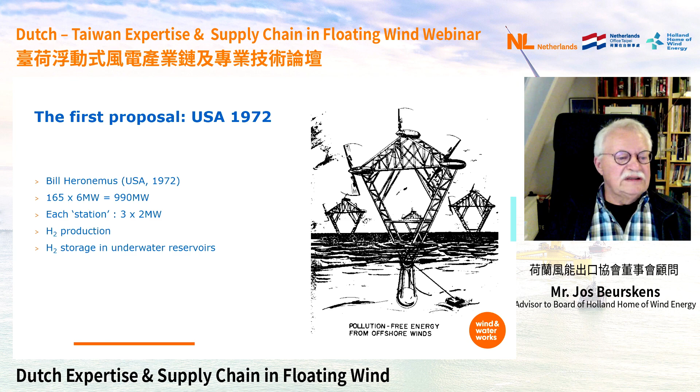But let's look now at the present situation. Next slide. Between '72 and now, quite a bit of research and demonstration happened. After a decade of relative quietness in this area, in 1993 research started both on national levels, but also within the IEA and within EU projects were initiated. There are many projects which were carried out, but here are the key topics.

Of course, we have been looking into resource assessment and mid-ocean conditions, which is actually an input for the design of the total system. We have been looking at the taxonomy of support structures, the dynamics of both the underwater world, the foundation, and what happens above the water level, the structural dynamics, the aerodynamics, and the aeroelastics of the wind turbine. The big challenge is to integrate those two actually separate scientific worlds, and to a great extent this has already happened.

Then came a period of specific design studies and designs, prototype testing we have seen in a number of countries. The first demonstration projects are in operation, and now we are at the brink of large commercial application. In parallel with commercial application, research into optimized logistics, port facilities, transport installation systems, and operation and maintenance is starting. If you ask the experts, they say there's no essential gap in the know-how. There's plenty of room for improvement, but all the essential elements of what we need to build those farms is available.

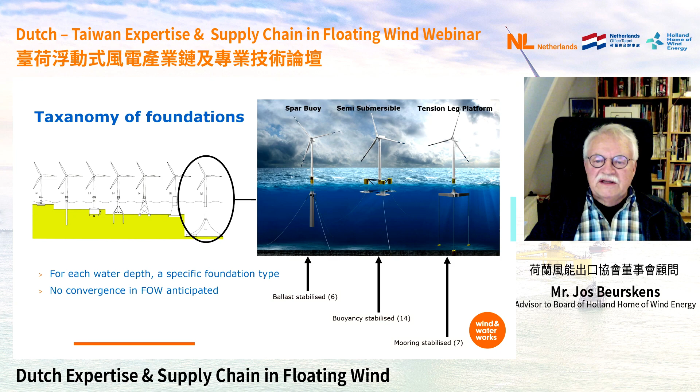In the next slide, I will show you that the choice is rather complex. If you look carefully, you will come to the conclusion that there is, for the time being, no predictable convergence in foundation type. On the horizontal axis you have the types, and on the vertical axis the aspects to look at, like relative steel mass connected to cost, critical water depth, transportability, port facilities, mooring complexity, etc. This list is longer, but the scores for different foundation types differ, and the optimizing process is very complex. That's why we will see many options in the near future which are, for the time being, very good.

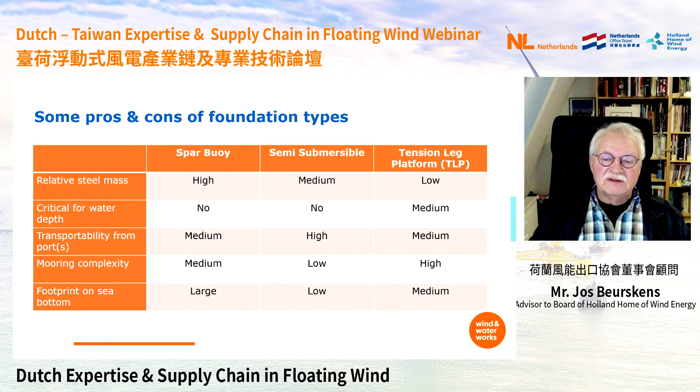The DNV, for instance, reports we have now 100 megawatts of offshore floating wind, and we will go to 250 gigawatts by the year 2050. That's 2% of the world electricity supply from floating structures, and 20% of the total offshore market at that time.

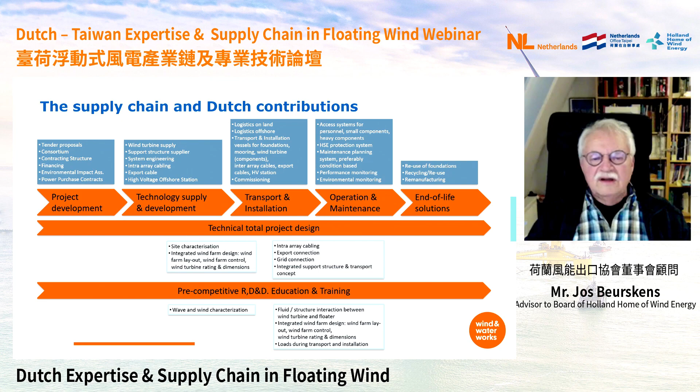A rough picture of the supply chain of floating wind in general. The blue boxes show the details, and the red ones the major blocks, the major elements. I will use this picture to show you a little bit about what the Dutch industry is now providing.

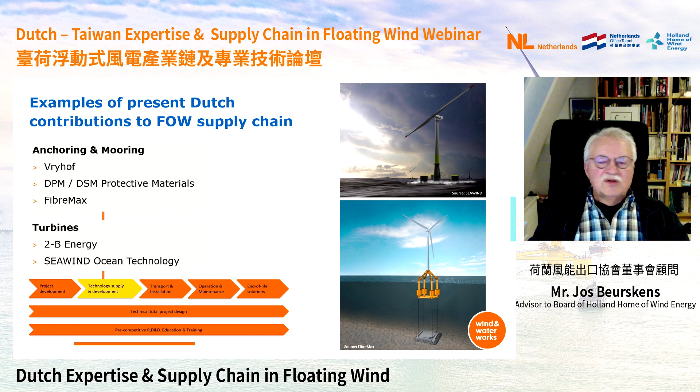This is a little bit of a strange part of the supply chain. I skip operation and maintenance, because there are no companies yet working for floating wind, but they are all working for bottom-fixed offshore wind farms, and it's not too strange a step to go to floating wind activities for operation and maintenance. But of course, there are particular differences.

End-of-life solutions become more and more important. The dilemma is that we have to take those aspects of the supply chain into account 25 years in advance of the actual activities, so it has to be an integrated part of the design process. There are a lot of developments and studies going on already, but it has to be included in the project design once again, and there are two things which are particularly important.

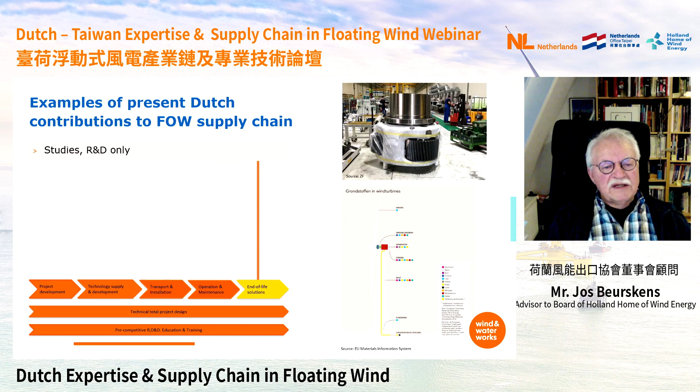That's the remanufacturing part. The rotating part might be refurbished to be applied in new wind turbine systems. This is a thing which can be adopted to a great extent from the automotive industry, where remanufacturing is a big thing—you cannot buy a new car which does not have a remanufactured part in it already. So that's something to look at, and it requires quite a bit of standardization to make this process an industry-wide success. The other one is the availability of precious materials from generators, etc.

That strengthens the need for recycling. Next slide, please.

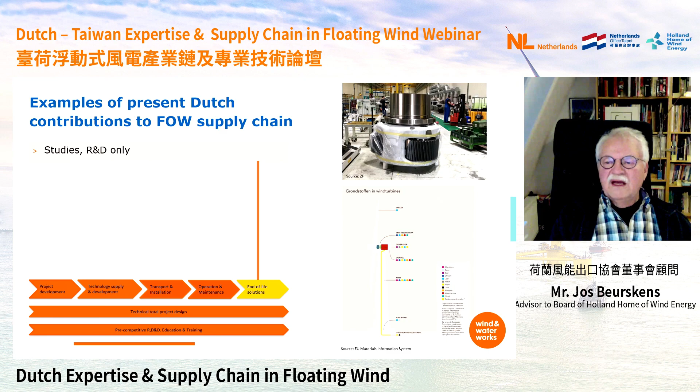Just a brief look into the future, which also reflects the challenges we are facing. We are on the brink of application. All the basic technologies are there, but we could reach probably much more dramatic cost reductions if we go to serial production. This is conflicting actually a little bit with the requirement that each foundation is specific for each location.

One way out, and we already see the first demonstration project in that sense, is to build those foundations like a toy Meccano box, for instance. So the elements are standardized, but the structure itself is specific for each location. I think that's very important. Further validation of models, of course, is important, so we can design structures in the future more critically, and thus also cheaper.

One thing which I personally find quite interesting is sharing operational data for standard development, in particular accidents and incidents experience. In the beginning of wind energy development in the 70s and 80s, this was essential—there was an open exchange, and it led to standardization, international standardization, and that also stimulated international trade quite a bit. I'm going to see also such a development in offshore wind, in particular floating foundation applications.

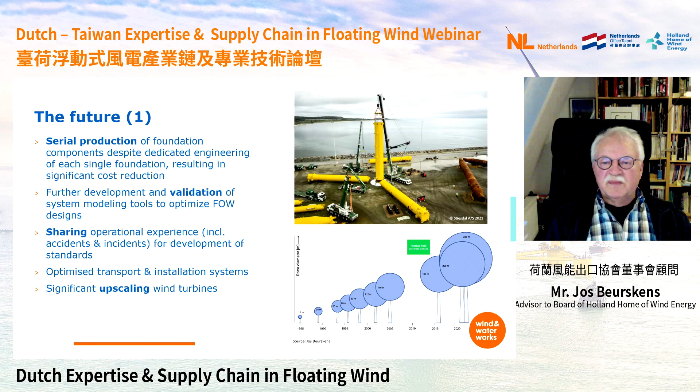And last but not least, government policy. If you go offshore, the government could de-risk these huge operations quite a bit by doing the preparatory work, like generating met-ocean data at particular sites, physical planning in their waters, providing for energy infrastructure—both electricity and gas, and in the future hydrogen—and also providing for artificial islands, which might have more functions and could serve as a service point near an area of gravity where wind farms will be created.

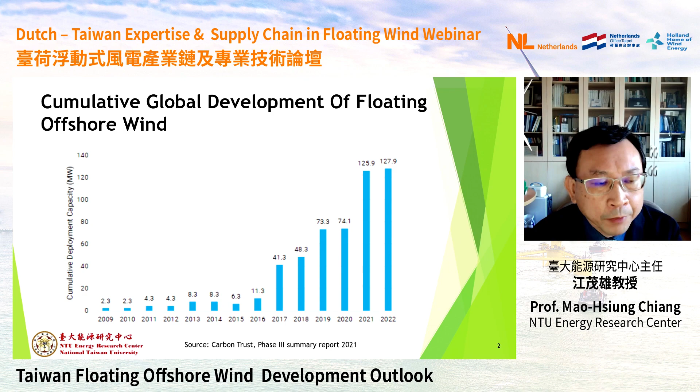Before we discuss the outlook of Taiwan floating offshore wind, we should first know the current status of international offshore wind. In this figure, you can see the cumulative global development of floating offshore wind. By 2022, about 128 megawatts has been developed. The trend is quite clear, and floating wind development and demand are increasing quite soon.

In this figure, you can see global floating wind projects. The first one is Hywind in Norway, then after that Portugal, Japan, Fukushima - several projects were conducted. In 2017, here we see Hywind Scotland, with installation finished in October 2017, using 6 megawatt Siemens wind turbines, 5 units, totaling 30 megawatts installed. It's a spar-buoy type for water depths of 95 to 120 meters.

The result is quite amazing because the capacity factor from last year averaged about 57.1%, and the average for the last two years is about 54%. This is much higher than the capacity factor of bottom-fixed offshore wind farms. So for us interested in floating offshore wind development in Taiwan, this result is quite positive for Taiwan to promote floating offshore wind in the future.

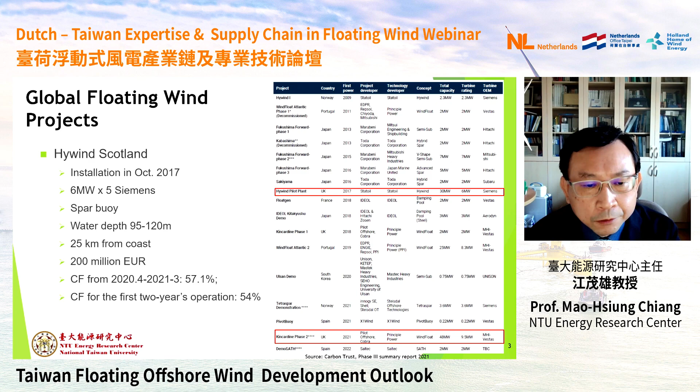We can also see Kincardine phase 1 and phase 2, which just finished this year. It's 50 megawatts, with water depth of 60 to 80 meters - quite similar to the situation in Taiwan's offshore wind farms. They use floating semi-submersible foundations with 9.5 megawatt Vestas wind turbines. This wind farm is quite similar to Taiwan's offshore wind farms in the future for floating applications.

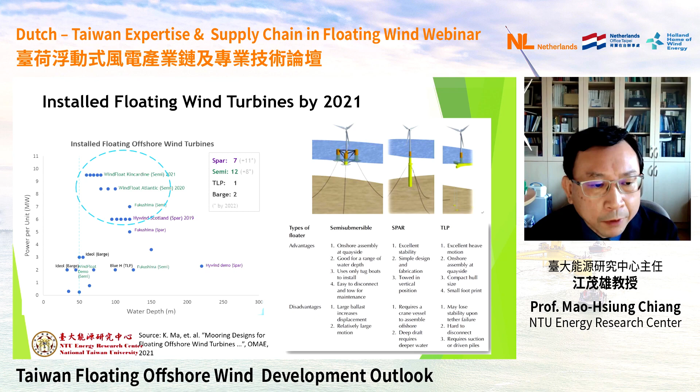By 2021, we can see totally spar type is 7, semi-submersible is 12, tension leg is 1, and barge is 2 - several different types of floating offshore wind have been investigated and demonstrated in different projects. The trend is more and more clear: spar type is suitable for deeper water, more than 100 meters, and semi-submersible type is suitable for water depths between 50 to 100 meters. In the Taiwan Strait, the water depth is actually lower than 100 meters, so semi-submersible type may be suitable for Taiwan's offshore wind farms in the future.

So floating offshore wind turbines installed in this area help to conquer the problem. Okay, next please.

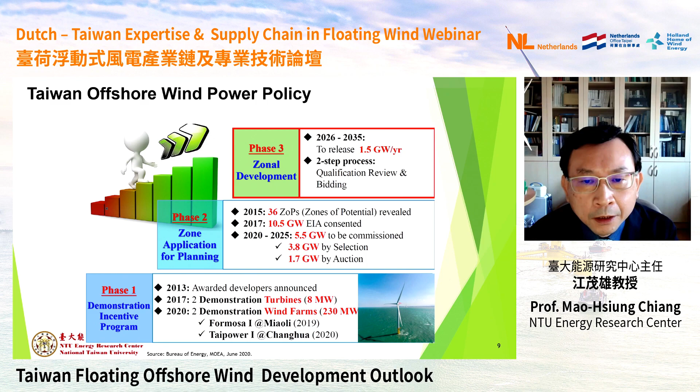In phase 3, next year in Q1 and Q2, the bidding will be open. So we will have another 15 gigawatt by 2035 that will be open.

Okay, next please. So for the EIA consent, we still have about 5 gigawatt in the area where water depth is lower than 50 meters. That means bottom-fixed wind turbines can be installed in this area. Besides that, in areas with more than 50 meters water depth, floating wind turbines will be in demand, and for floating wind, localization will be expected.

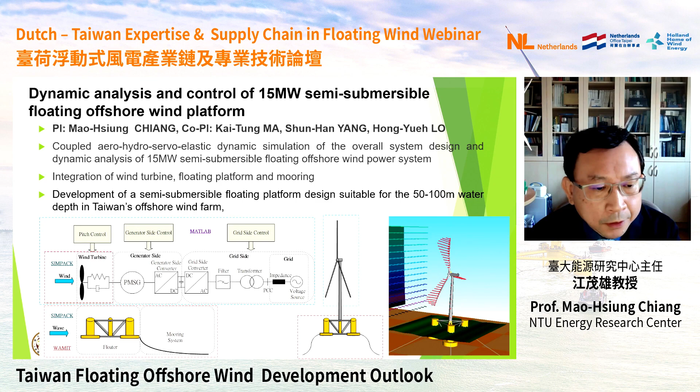Now we use a water depth of 75 meters, and the model includes the turbine, the generator, and the grid-side model, combined with the floating platform model. Okay, next please.

So we first established the dynamic model of the 15 megawatt wind turbine, and also tried to analyze a suitable site for the future - I will talk about this in the next slide. We would like to have an R&D demonstration project; that's a suggestion for the government. Next please.

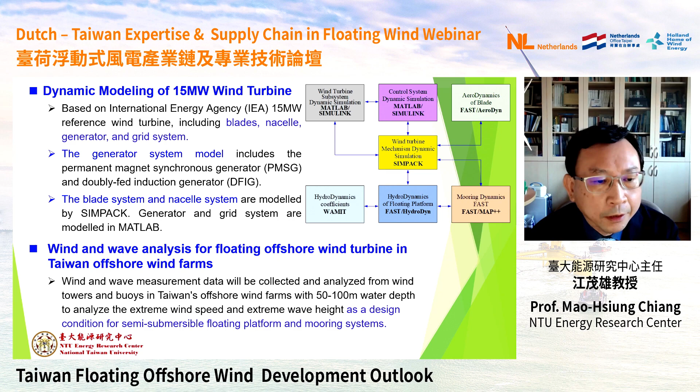We also established the floating platform design and dynamic model, then implemented co-simulation with the software FAST, Simulink, and MATLAB together. Next please. So very quickly, the figure.

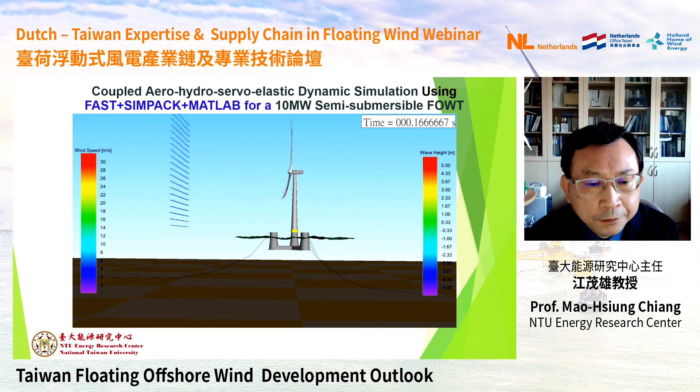It's a result of our research of 10 megawatt floating offshore wind turbine with the IEA platform. Based on the model, we can verify the design of the platform and the coupling interaction between the turbine and the platform. So the next step, we will verify the new platform developed by SOIC and combine it with our wind turbine.

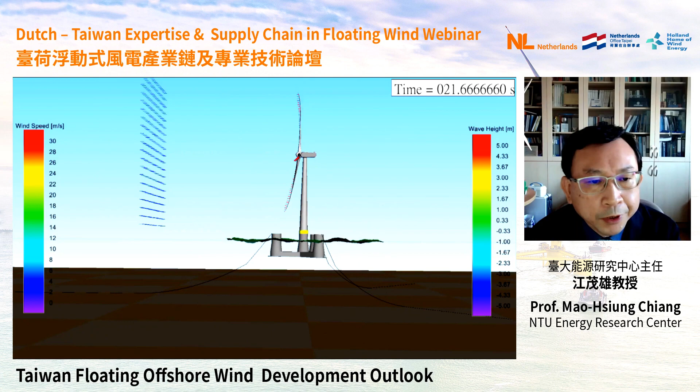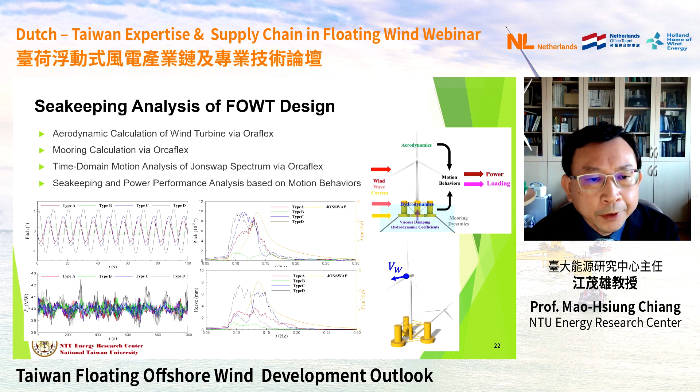The sub-project is done by Professor Xiu Zhao. You can see the hydrodynamic analysis will be developed here, and the seakeeping analysis will also be implemented in this sub-project.

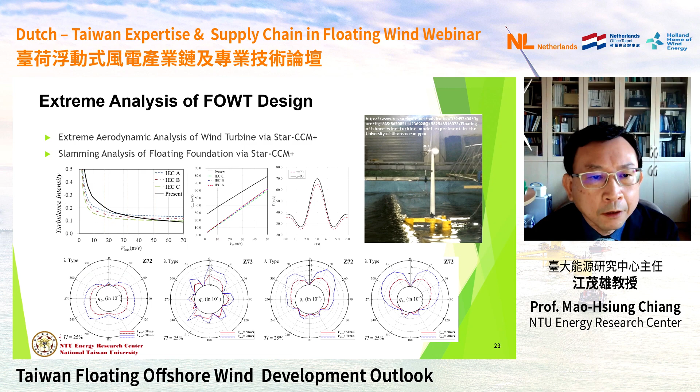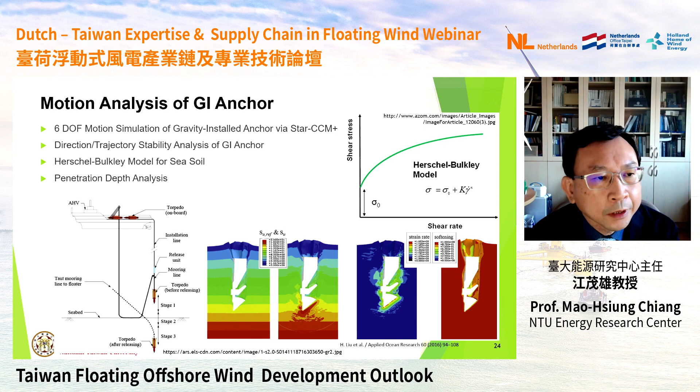We will also analyze the extreme condition for the floating offshore wind. And also in sub-project 3, we will develop the mooring and the anchor. In sub-project 2, we also implement the motion analysis of the gravity installed anchor.

The PI for sub-project 3 is Professor K.T. Ma. K.T. Ma is an expert in mooring and anchor, with more than 30 years experience in oil and gas in Houston, USA. We just invited him to come back to Taiwan to join our team.

The co-PI is Professor Sung Yang. He also just came from Sweden, from Europe. He just joined the 15 megawatt wind turbine project in Sweden. So in this sub-project, we're including the floating platform design.

For the 15 megawatt semi-submersible and the floater dynamic motion analysis, which will be cooperated with the ship and ocean R&D center, and we will work together for the development.

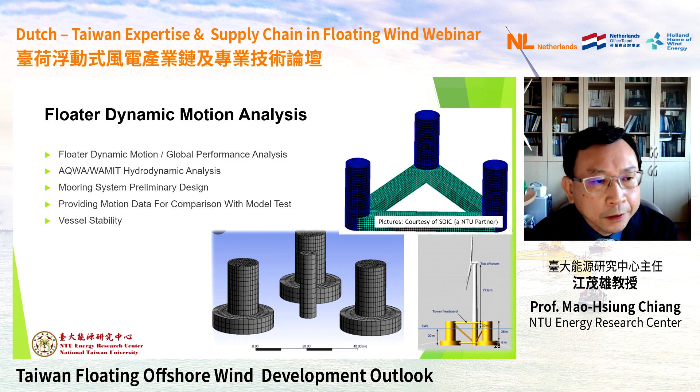And also the mooring system design for the Taiwan water depth and the Taiwan soil condition of the seabed.

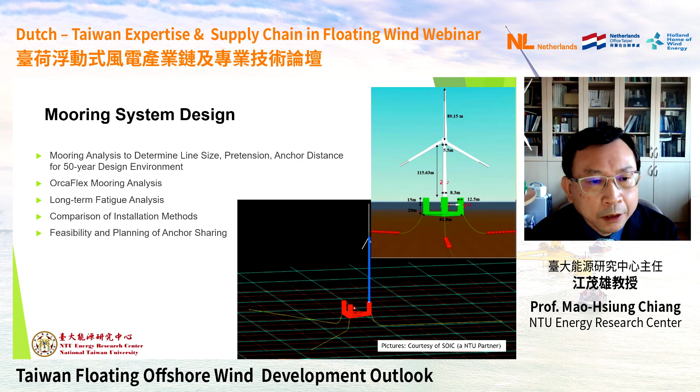And in this project, we also try to investigate the anchor, the gravity installed anchor. We still have no idea if the gravity installed anchor is suitable for the soil conditions in Taiwan wind farms. So in this project, we will try to investigate.

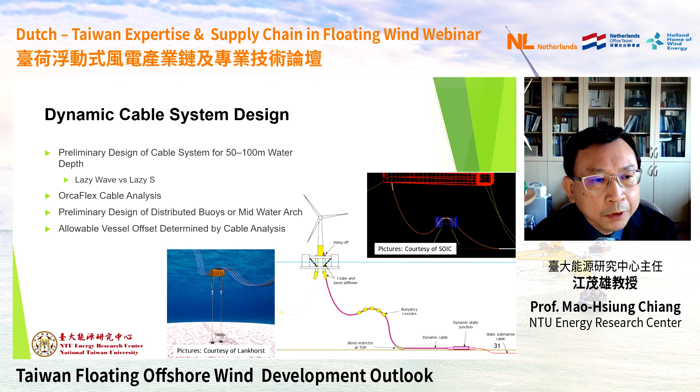And also the dynamic cable system design. As you know, the problem is actually more serious for shallow water. In the Taiwan Strait, the water depth is between 50 and 100 meters, so the dynamic cable problem will be serious.

In sub-project 4, the PI is Professor Jinfa Cai. We will conduct a model test in the towing tank of our department.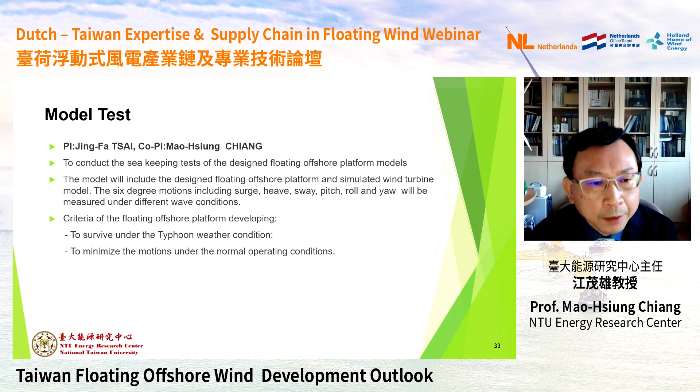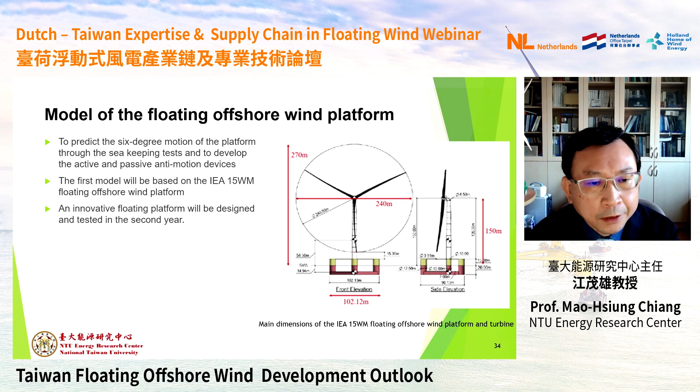It's the IEA 15 megawatt wind turbine, and we will combine it with several different types of floaters, including the IEA floater and the floater developed by SOIC. We can compare the performance not only in the model test but also in the simulation.

Now we can have a look at the TRL in the projects in Taiwan. In both projects, not only the project in NTU but also the project of SOIC, we can now achieve TRL4 - it's a tank test. Compared with international projects, we are a little bit slow, so we have to accelerate the development speed for floating wind in Taiwan.

So what's our next step in Taiwan? We serve as a third party, and between the Taiwan government and wind farm developers, we give suggestions and comments to both, trying to give guidance for the right way forward for floating wind in Taiwan.

So we have to look not only at Taiwan, but also at the situation in APEC countries like South Korea and Japan. The Korea government has announced a goal of 12 gigawatts in the Ulsan wind farm, including 6 gigawatts of floating wind by 2030. So I think for Taiwan, we now have the advantage in the development of offshore wind.

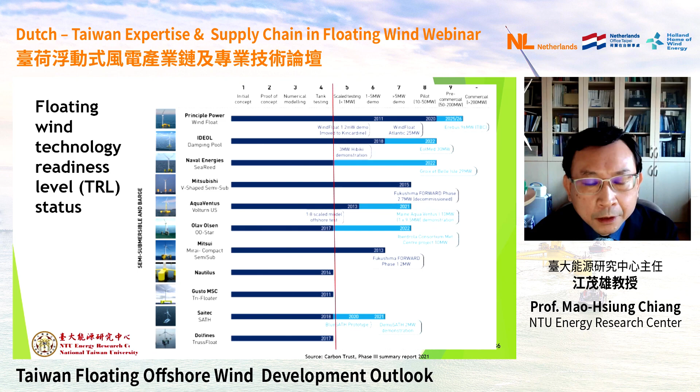But the next step is the deep water zone, where water depth is more than 50 meters. What's our advantage there? Actually, we are now a little bit slow - the development speed is slower than Japan and South Korea.

So the outlook is, we now try to combine the wind farm development in Taiwan and also the supply chain industry and research institutes like SOIC and the university side in NTU to achieve the Taiwan floating wind team, to accelerate and promote floating wind development and design, analysis, manufacture, certification, installation, and regulation of the floating platform, mooring, and anchor in Taiwan. First, we would like to promote the Taiwan floating wind R&D demonstration project for 1 to 2 megawatt scale by 2025 to verify the R&D and performance.

The next step is to promote the pre-commercial project for 100 to 200 megawatt scale, but the timing is still under discussion. In comparison, Korea will have a 6 gigawatt commercial floating wind farm by 2030. Our next step for the pre-commercial project by 2027 or 2028 will be a suitable time point, and after that we can have a commercial floating wind farm by 2029 or 2030.

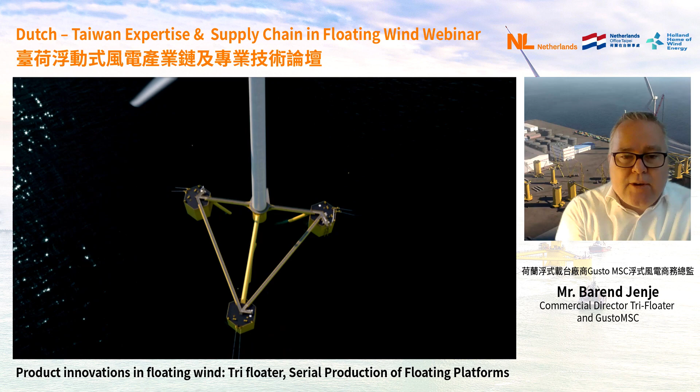In 2013, we changed that to a flat-plated deck box construction, the picture shown in the previous presentation. Today we're looking at our third generation, scalable for 15 up to 20 megawatt turbines: the new third generation Tri-Floater. This Tri-Floater has just been tank tested in Ocean​ide, France. It's a combination using flat-plated welding industry and making use of existing bracing industry.

The most important thing when it comes to floating wind is all about supply chain. There are at the moment over 100 different designs out there, each with their pros and cons. What we see is that fabrication and assembly of these structures is crucial. You need to find proper assembly sites and proper fabrication sites. The floating wind world is dominated by local content requirements set out by different governments, so you need to be prepared to do local activities.

Next slide, please. So again, we are looking at a 15 megawatt plus design. If you want smaller turbines, that's also possible—this unit is also scalable downwards. It's again a braced semi-submersible structure, with the turbine positioned in the midst of the three main columns. Next slide, please.

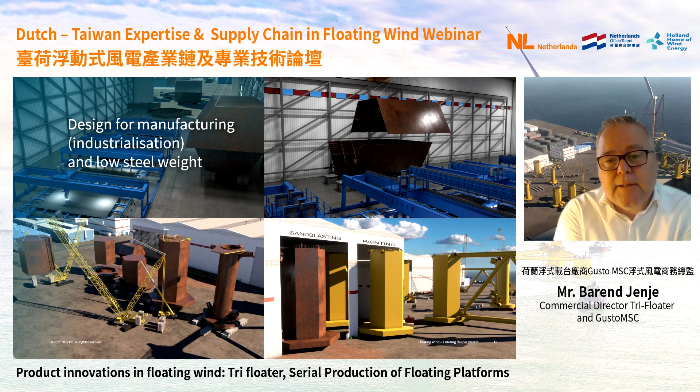We will bring blocks to an assembly site. That can be the same site as fabrication, but typically the assembly site will be closely located to the final destination of the floater itself. We will bring in blocks as much as possible pre-outfitted to the assembly site.

The bracing structures will potentially also be pre-outfitted, making the assembly process as easy as possible. The quay site you look at there would roughly be about 500 meters. You may think the structures are big - yes, they are big, about 100 meters in length and 30 meters high. But any type of floater, whether it's a semi, a spar, or a TLP, will require large quay sites available for assembly and launching.

Talking about 300 units on a yearly basis, assembly sites typically have capacities of 15 to 25 units per year that they can build. That requires large sites available to do the full assembly. For that reason, you want to make your assembly as easy as possible - pre-outfitting and doing works at the bracing manufacturer as much as possible, bringing it to a single location and doing the welds that you need to do.

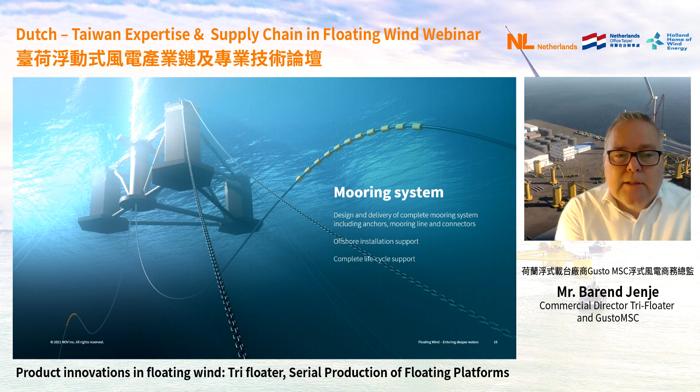With that also comes connectors and tensioners. We have a manufacturer in our company that can do the manufacturing and design of tensioners and connectors - that's NOV BLM, based in France.

All outfitting material needs to last out there, like the floater itself, for 25 to 30 years in a marine environment. For outfitting material like stairways, handrails, bulwarks - everything we can do as outfitting - we will propose that to be composite. Composite has the advantage of a longer lifetime than steel in the marine environment; there will be no corrosion, so paint jobs won't need to be done every five years. We also do the small cranes and davits on top of the structure - all in-house activities.

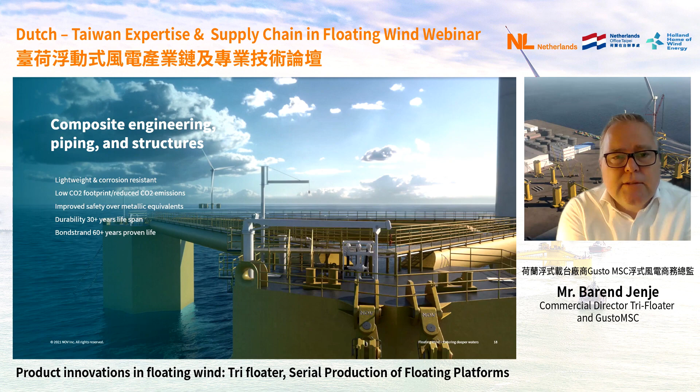Within the field of floating offshore wind, there's a big portion when it comes to inter-array and export cabling. For that, we have solutions for support vessels. We do full spreads of cable lay. We design, engineer, and manufacture the carousels. We do cable lay tensioners - so all activities on the cable side we can support.

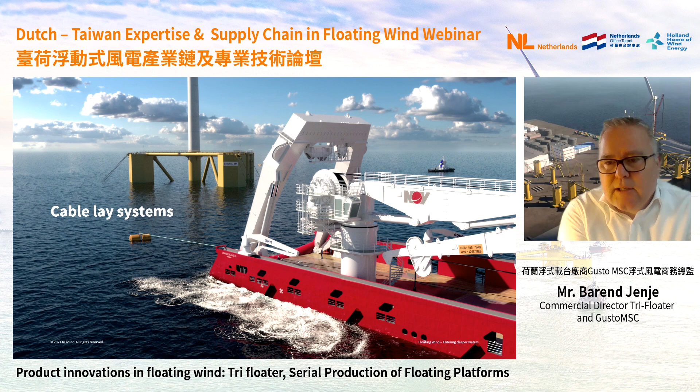And last but not least, more and more we see the combination between offshore wind in general and hydrogen. Within the hydrogen region, we have solutions for subsea storage of either hydrogen or ammonia, and we provide all kinds of flexible lines to transport hydrogen and ammonia to and from the electrolyzing unit or back to shore.

This is what we offer, and this is how we feel the supply chain of floating offshore wind should be made easier. The supply chain for floating offshore wind is complex - it's not only about design, but in the end it's cradle to grave: from design all the way to assembly, to fabrication, installation methods. In the end, you will need to bring the unit back to port after 25 to 30 years and decommission it. The steel of which the structure is made can be reused and brought back to the steel mill and reused in full. So that is what we do. Thank you very much, and I hope to hear some questions from your side.

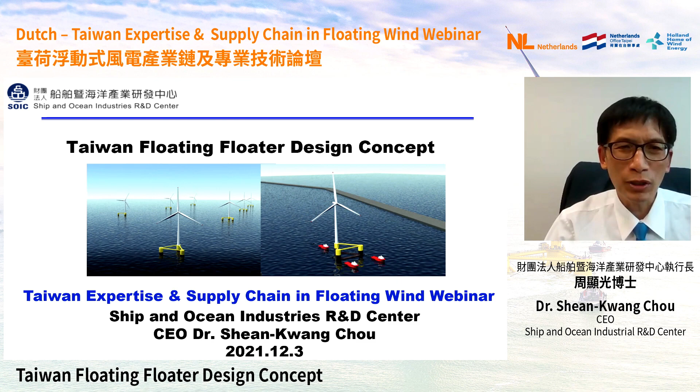Thank you, Jennifer. Good evening, good afternoon for the friends from Taiwan, and good morning for the friends from the Netherlands. I'm Shean-Kwang Chou, the CEO of SOIC. What I present today is more or less similar to what has been presented by Gusto.

First, a very brief introduction of who we are. The former name of SOIC is USDDC, United Ship Design and Development Center. We were established 45 years ago under the Ministry of Economy, National Defense, and Transportation, with shipbuilding as our main goal. Then 10 years ago, we transformed to include marine and ocean industry as one of our developing goals.

Why SOIC? We think that in Taiwan, mostly the floater provides buoyancy to support a wind turbine. We believe the most suitable type for Taiwan is the semi-submersible floater, which is similar to ship design in terms of stability, seakeeping performance, and structural analysis. We have 45 years of design experience in ship shape structures, so we are quite suitable for this kind of development. I will introduce some research projects in this area, and we also offer marine operation assessment and marine warranty survey services. If you're interested, we can have further contact about this.

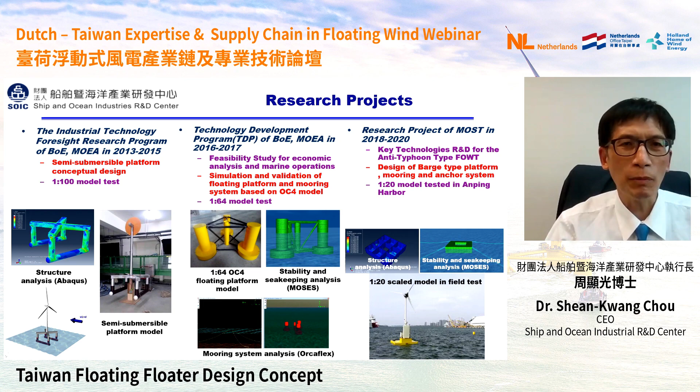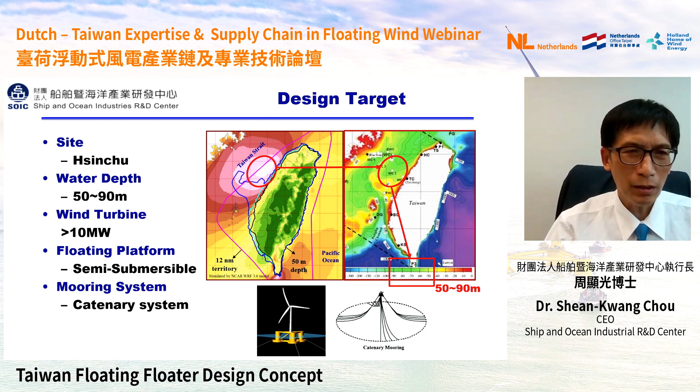As Professor Jiang mentioned, our target is the Hsinchu area, with water depth about 50 to 90 meters. The wind turbine is for upcoming big wind turbines, semi-submersible, and the mooring system adopted is the catenary system.

The specifications and constraints for the design include metocean data with typhoon records. The wind turbine is IEC T-class. Extreme condition data comes from the Hsinchu buoy and calibrated simulation for 20 years in the Hsinchu area. In this design, we consider the capacity of the local supply chain, including infrastructure for the fabrication site, shipyard dimensions, constraints for the assembling port, water depth, and logistics for transportation and installation. We put all these constraints into our concept design.

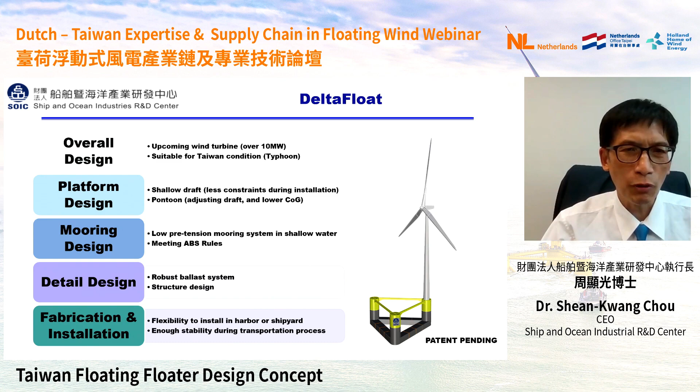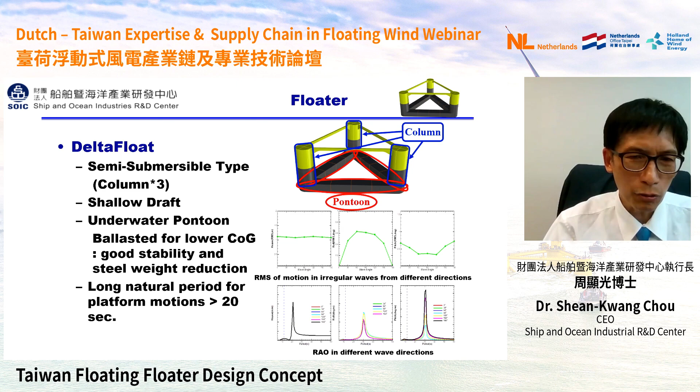First, the floater is somewhat similar to a tri-floater, called a DeltaFloat. It has 3 columns, semi-submersible type with 3 columns, and in shallow water we have an underwater pontoon. The pontoon holds ballast water to keep a lower center of gravity for good stability and to reduce steel weight. The natural period of this platform is longer than 20 seconds, so we can avoid the natural frequency coinciding with wind or wave conditions.

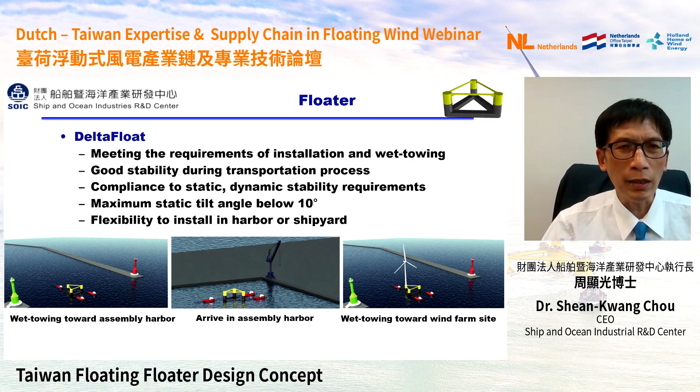The DeltaFloat also meets requirements for installation and wet towing conditions, and compared to regulatory requirements, the maximum static tilt angle in all processes is below 10 degrees. It can be installed with the wind turbine in harbor or shipyard.

The principal dimensions of the DeltaFloat at this stage: the centroid to column distance is 40 meters, column diameter is 12.5 meters, and pontoon height is 7 meters. The design draft is 20 meters, and displacement including ballast water is almost 20,000 tons, but steel weight is less than 4,000 tons. The minimum draft during transportation is only less than 4 meters.

We also have structural design to simplify the structure. The connection for the upper structure has no bracing, only minimal bracing, to reduce the fabrication process. This shows some pontoon sections: top view, profile view, and the connection of the pontoon.

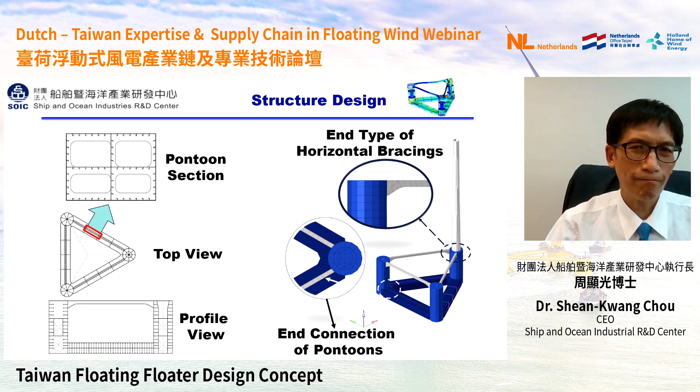Okay, this is some stress distribution of the structure under loading from different wave conditions, analysis for demonstration.

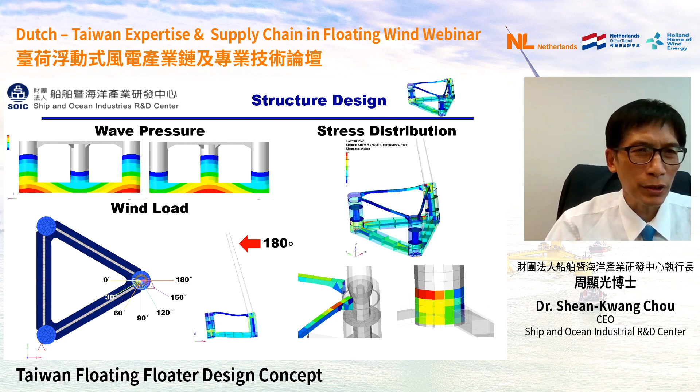Okay, this is for the mooring system design. We designed 2 types of mooring system. One is a 3 plus 1 chain, a larger chain system. The other one is 2 chains for each column, so it's 3 plus 2 chain. So the larger chain system, and the smaller system is designed for redundancy. If one chain breaks, it can still hold to satisfy the minimal safety requirement.

So the design is under the 3-hour JONSWAP wave dominant condition. We find that this is the most critical condition for the Taiwan condition. And in this condition, the surge, the maximum surge for all lifetime conditions, is less than 20 meters. We can see the time domain analysis of the response for the whole thing for the 3-to-1 condition.

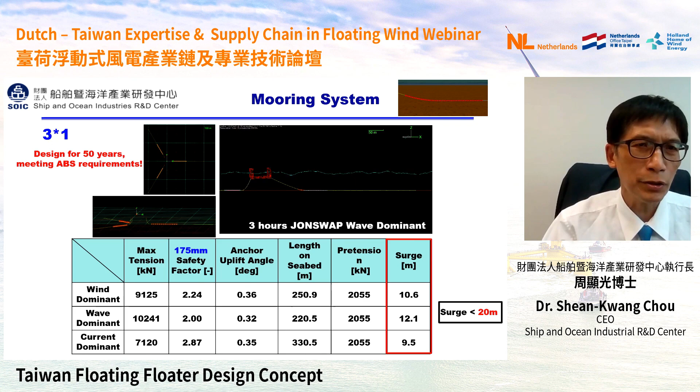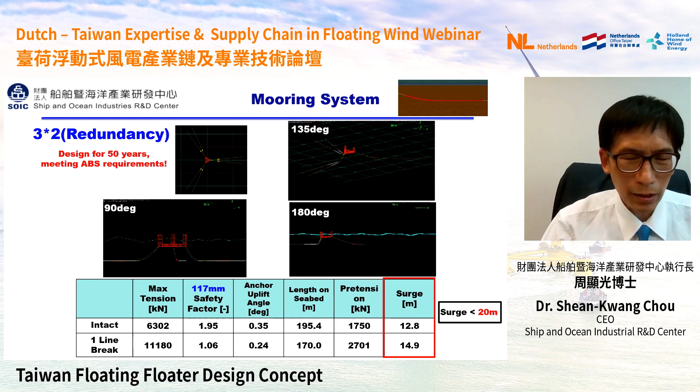The 3-to-2 design is what we call a redundancy design condition, designed per ABS for the 50 year design condition, from different coming wave directions: 90 degree, 135 degree, 180 degree condition for the time series. The surge, even in the one-line break condition, is still less than 20 meters. This is what we see in ABS practice.

For the dynamic cable, the power cable, a different kind of dynamic cable design. We found that in this kind of shallow water condition, the most suitable is the lazy S shape arrangement.

This is the condition for the extreme case. Even in this kind of S-shape, we still need a mid-water arc to confine the motion of the cable, so that the bend radius and tension analysis stay within the safety requirement. Actually, in shallow water during extreme conditions like a typhoon, it's very challenging for the mooring system design. We found it even more difficult than deeper water, like 60 meter water depth is more challenging than the deeper water condition.

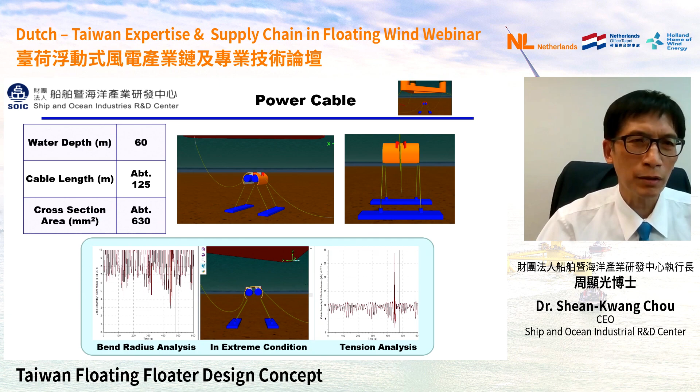We designed the ballast system with 6 ballast pumps, 2 in each column, for redundancy arrangement. We have the passive ballast tank and the active ballast tank. The fixed ballast tank and the pontoon adjust the draft for transportation and for on-site work. We use the active ballast tank system to transfer ballast water between the column and the piping system to adjust the trim. We can fulfill adjusting the trim and leveling the platform within 30 minutes for all cases, to keep it upright to maintain the turbine's performance.

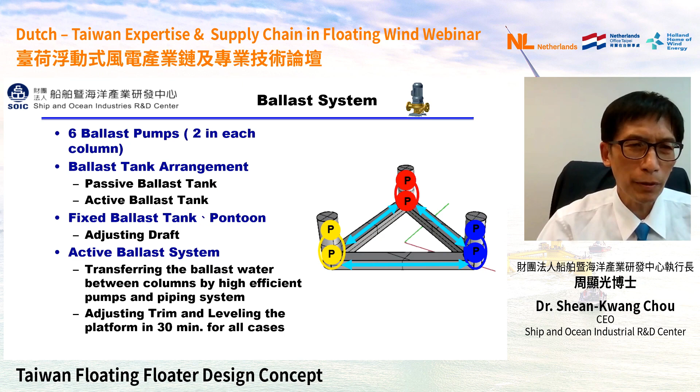So we have 2 cycles. The external cycle adjusts the draft. We have an internal cycle to adjust the trim. So the 2 systems can operate simultaneously or individually.

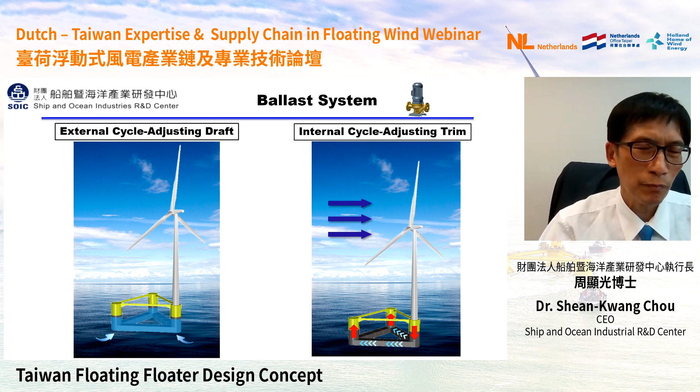So we use this to show the semi-submersible floater design. We have the ballast system, the power cable analysis, and the catenary system. Most of the data has gone through this kind of concept design process.

So actually, we have to go through all the design for Taiwan's concept design, and following this, I think we have a video to show that result for your reference.

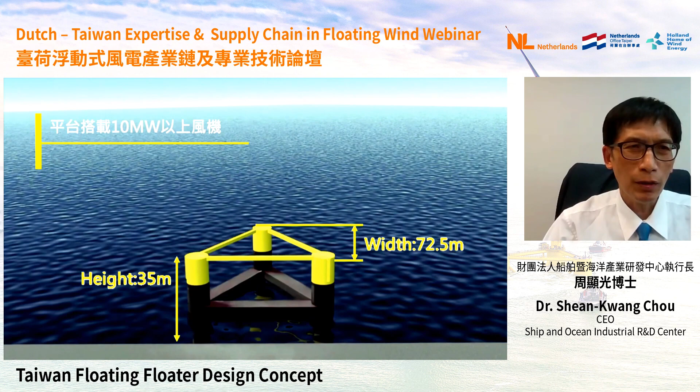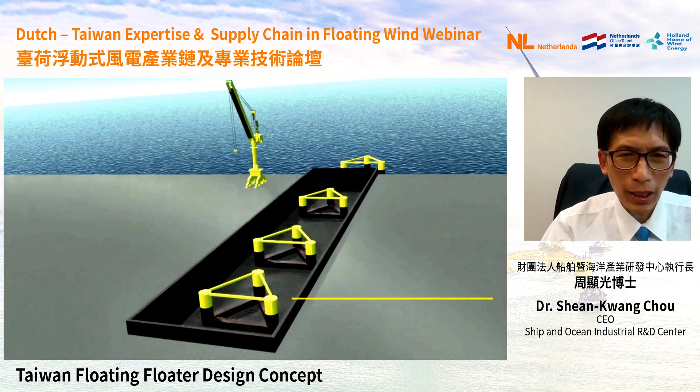The floater, the principal dimension which we have shown in the presentation. It starts from the fabrication site, even in the shipyard or at the shore site, and wet towing to the fabrication yard. And then going to the assembling harbor to install the wind turbine.

We have to consider crane capacity, upcoming wind capacity. So maybe it should be assembled separately, not in one time, but several times, because the crane capacity right now is not big enough for one-time installation. Maybe we have to separate it into several operations.

And then we have to wet tow toward the wind farm site. When it goes to the wind farm site, the mooring line connects to the preset mooring system, chain system.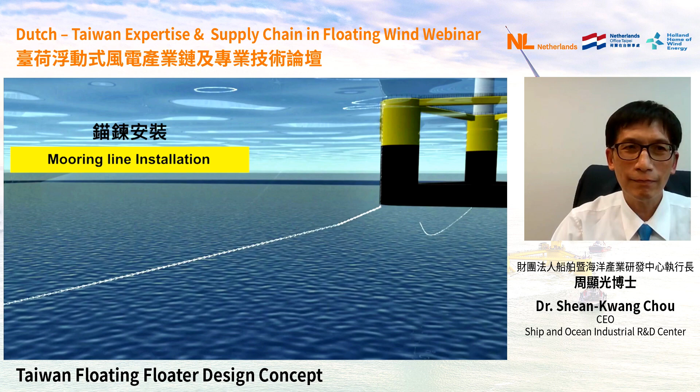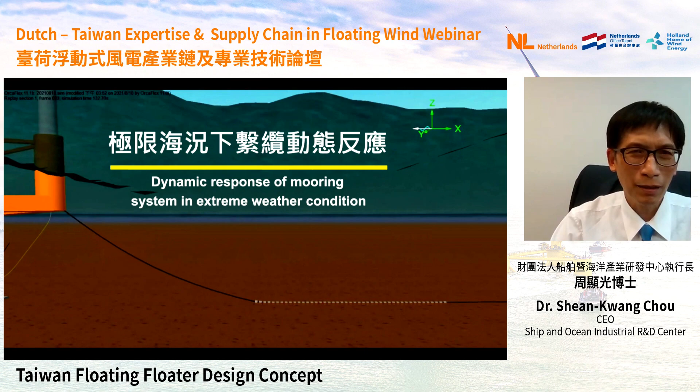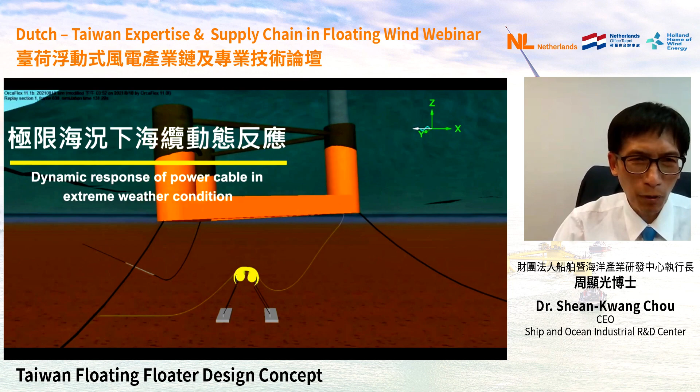And that's the extreme condition. Under extreme condition, the dynamic response for the mooring system - this is the most critical condition in the time history of the analysis. It's the moving of the dynamic cable. The midwater arch can reduce the motion of the cable so that the bend, the tension, and the bend radius can be within safety limits. So for the conclusion, we have gone through all the process and have some preliminary results for the design for Taiwan. The Delta floater is the design from SOIC based on 45 years of experience in ship shape design. Thank you for your attention.

Thank you, thank you, CEO Shean-Kwang Chou. Thank you, 执行长. It's really impressive to see how far Taiwan has gone, and it's very impressive to also see the Delta floater animation. We hope to see that in practice with real sea testing in the future.

Next, our speaker is Ms. Stephanie De Decker. She's the Business Development Manager of Floating Wind for Boskalis Offshore. Boskalis is a well-known Dutch maritime engineering company, and they are currently completing the Kincardine project milestones. Stephanie has built up her experience in the oil and gas sector, involving installation of floating offshore structures. She's also promoting Boskalis' capability and fleet for the transportation and installation of floating wind foundations. Today, Stephanie is going to share with us the installation of floating wind foundations from the T&I contractor perspective. Let's welcome Stephanie.

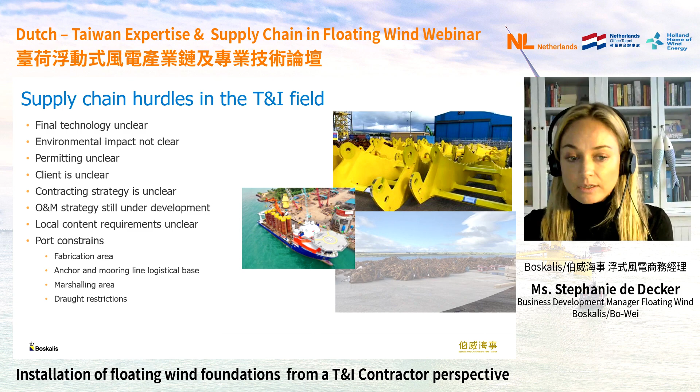Looking at the typical supply chain, there is a limited amount of fabricators which have the ability to fabricate 40 to 50 units in a 2-year season. That's a challenge - so where are the foundations coming from? We're looking at 15 megawatt turbines, which reduces the amount of floaters, a good thing. So less floaters to provide the total capacity of a wind farm.

However, we are looking at floaters with the size of a rugby field. As you can see here in these pictures, we had one floater for the Kincardine project on our barge Fjord, which is a 60-meter deck area. That gives a bit of perspective, but transporting these items and using most of the deck capacity requires innovative solutions and transport taken care of from the early design stages. In the bottom left, you see an example which can lead on a good use of the deck area for transporting multiple floaters or multiple blocks of floaters.

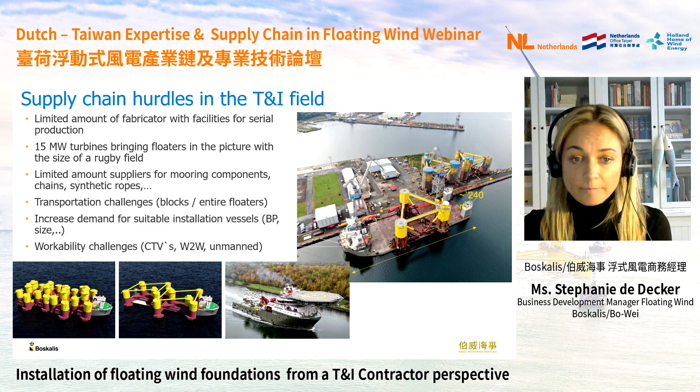So Boskalis commits itself to tackle these challenges with the entire supply chain. We integrate supply chain considerations, but also transport and installation challenges early in the concept design. We do this together with developers, with concept designers. We bring a lot of knowledge also from the oil and gas, and we do not have to be blunt - there is so much knowledge there.

Installations in 2,000-meter water depths are taking place. 10 FPSOs are being installed every year. So we should make use of this knowledge, and we should additionally look into how we can innovate the processes that we have been doing in the oil and gas.

Clever solutions will bring these costs down, and within Boskalis, we are investing heavily with our R&D department to look into solutions for the transport and installation of floating wind and the seriality of it.

Also, investing in local labor and skills, reskilling, that's an opportunity. Here in Taiwan, we invest in Taiwanese cadets on board of our vessels. We run traineeships with universities because sharing is caring. So we engage with the local players to make sure that they are ready for it. What is not in land, we can teach.

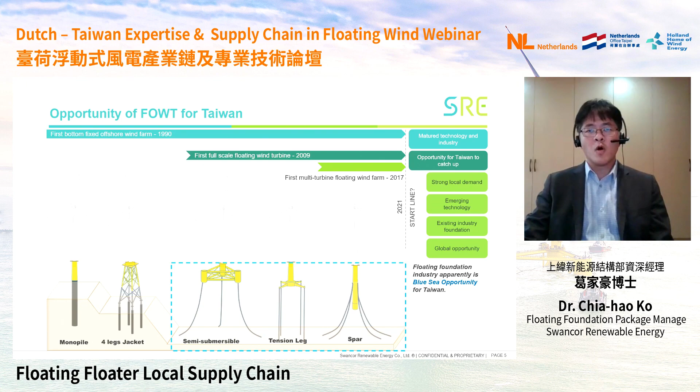There are four major stages of project development for a floating wind project. The very first is the engineering stage, including floater design and mooring design engineering work. Compared to bottom-fixed, the floater is much more sensitive to environmental loads like wind, wave, and current. So in the very beginning, we need to pay a lot of attention to make sure we have well-defined meteorological criteria as well as geotechnical information. Meanwhile, we will heavily use our local infrastructure, for example fabrication, harbor, and shipyard, so we also need a good understanding of all this information and the condition of this infrastructure. We also need to understand our strength, our local expertise and experience. All this information needs to be collected and input into our initial floater and mooring design before moving to the next stage.

Once we have the design, we can move to fabrication. As the speaker mentioned, if we're talking about 500 megawatts of wind farm, using a 14 or 15 megawatt wind turbine, we will need to build, deliver, and install maybe 30 to 40 floaters in a very short period, maybe year 1 or 2. This will be massive and serious local fabrication, requiring well-planned execution and logistics management.

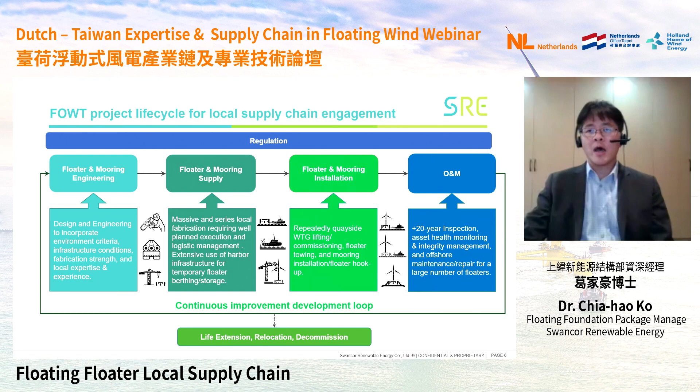So with this kind of opportunity, what is our consideration or key strategy for local supply chain engagement in Taiwan? I'd always say the very first important thing is technology, and technology comes from people. So we are focusing on talent development and local people development. In addition to local people, right now it's a global world, a global village. We also continue to look at and acquire professionals and knowledge internationally, and we would like to mobilize professional people to our team to focus on technology development.

In addition, there's fabrication. As I mentioned, Taiwan has a very good foundation for fabrication, but when we talk about floater fabrication, this will be a different stage. We need to improve our quality and advance our production capability so that we can deliver several floaters a year, or within 2 years down the road, to support all the project development.

And as Stephanie also mentioned from a T&I perspective, I think the mindset is totally different from bottom fix. As I said, we need to tow out the floater from the harbor, and we can do the wind turbine integration just at the quayside. Also, because of the nature of floaters, maybe we can do storage not on land - we may consider doing the storage just near shore. How we can manage and find new ways for all these kinds of new transportation or logistics challenges relies on visionary and agile innovation from the T&I perspective.

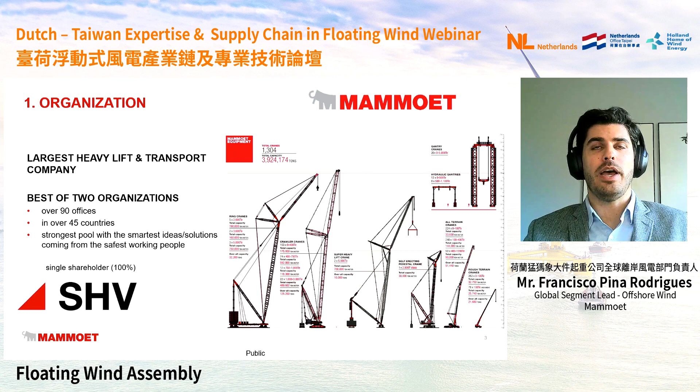As Mammoet, we provide solutions to any heavy lift and transport challenge. We do this by operating the world's largest fleet and pool of equipment, from smaller to larger crawler cranes, from trucks to SPMTs, barges, transjacks, and others. Together with our R&D department, we keep pushing boundaries and innovating beyond what we imagine. A large part of our equipment is also in-house developed and tailored, designed to suit our clients' needs.

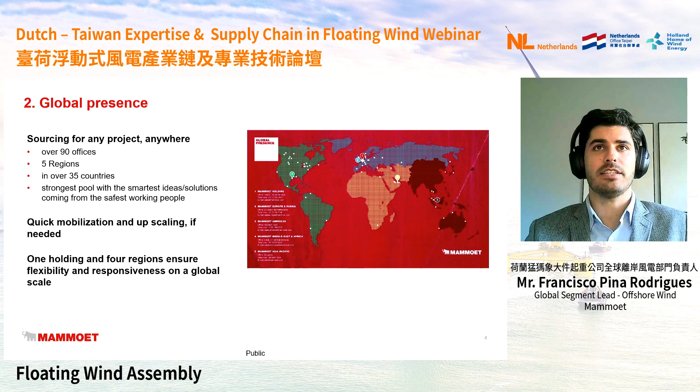Being part of the renewable market for the past 15 years, it's also our responsibility to think about our emissions and make every effort to reduce our carbon footprint. To achieve this, we have a clear pathway to 2030 and beyond for how we're going to develop this internally and with our suppliers. This includes bringing in electric cranes, hybrid vehicles, and electric SPMTs with power packs, among a list of efforts we're working very hard on with our R&D to achieve a clear target of having 30% of our equipment carbon neutral across our fleet by 2030.

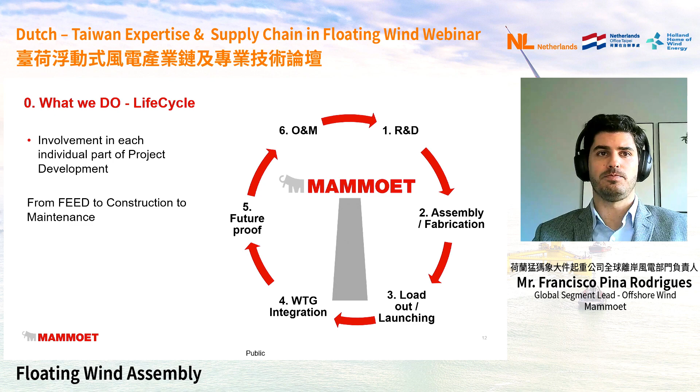So to give you five areas which we are focused on in the R&D phase: the first area is ports, the assembly phase, and how to best make use of ports, knowing the industry is aware that not all countries have the right ports or the ports necessary with the space and capacity for these types of projects. We're supporting the industry in ensuring that suitable ports are available for floating wind.

We do this in numerous ways. Sometimes we do engineering studies, or checks on existing facilities or new builds. We also have two examples of jobs executed in Taiwan where we were responsible for upgrading the conditions needed at the port to execute these works. So this is something where we also have experience.

The second topic where our R&D teams are investing heavily is floater launching, and the challenge to move 3,000, 5,000, 10,000 ton structures from the quayside to the water. We're also putting efforts into cable pull and mooring tensioning, work to be done both at sea and in the port.

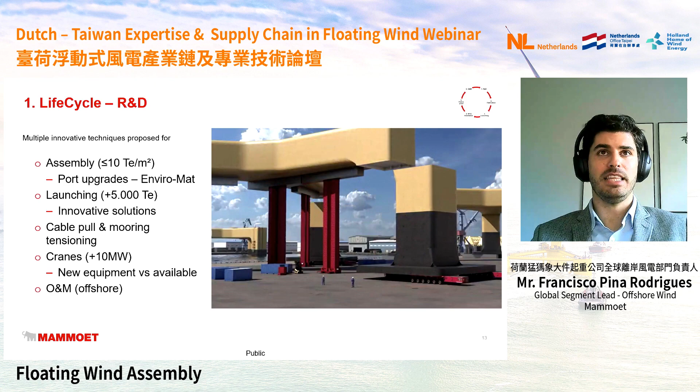So, trying to capture some of the lessons based on the experience we have been gathering from the 8 projects executed, but also the R&D we have been doing.

Mainly, one of the challenges we see in the assembly and fabrication space is the lack of space and the technical requirements needed to overcome the ground conditions at the quaysides, meaning very heavy floaters that need to be produced in series, along with the engineering behind the storage and movement of all these components.

One of the challenges we identify is moving from a prototype mentality to a serial production mentality, where time is money more and more. And we feel that...

One of the ways we can improve and speed up the construction of the floaters is by taking a modular approach, as we have done in several other industries in the past.